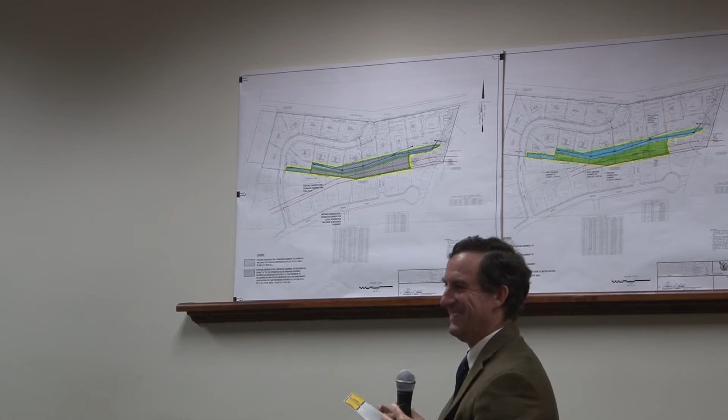RU 85. There you go. Football wasn't so good then either. Some things stay the same.

I'm going to mark A2 as plan sheet number 1 submitted as part of the application, which has been highlighted in color, and I'll describe those highlights in a minute. A3 is sheet 2 submitted as part of the application, again with highlights in color to mark some areas I'll describe in a minute. And A4 is a soil erosion and sediment control and landscape plan for Hillsborough Estates, which I received from the engineering department of Hillsborough Township, which I understand is part of the record for the approved plans for the project.

Let me walk through the highlights. First, the boundary we're talking about is being referred to as a conservation easement, a drainage easement. It's both. That's part of the issue, I think — it's not one area separately delineated as a drainage easement and one area separately delineated as a conservation easement. It's a conservation and drainage easement. So when we talk about changing the conservation easement to allow for some drainage, the conservation and drainage easement already exists.

I think part of the impractical aspects that has brought us here today is the enforcement part from the township's perspective — what staff members and homeowners are allowed to do and not do in those areas within the easement. And what makes it particularly impractical is not being able to mow the area — we've referred to it as a swale a number of times already, but the swale actually has drainage pipes in it.

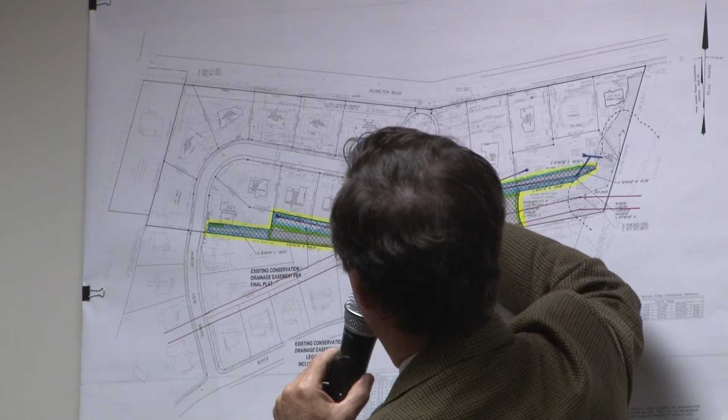There's catch basins behind these homes, there's pipes connecting the inlets. Going to Exhibit A2 now, directly behind all these homes, there's an inlet with a pipe going to another inlet, with a pipe going to another inlet, which collects runoff from the road through a drainage easement between two of the homes — lots 1911 and 1912 — and then continues on with a pipe to another inlet and down to the detention basin.

So the drainage features in that easement are not just swale areas that transmit overland flow — they're underground features, and obviously we can't allow trees to grow over top of pipes and inlets that are intended to provide for drainage. These are drainage features that are the responsibility of the homeowners association to own and maintain. That's really one of the fundamental engineering aspects of this application, which is intended to clean up what was intended.

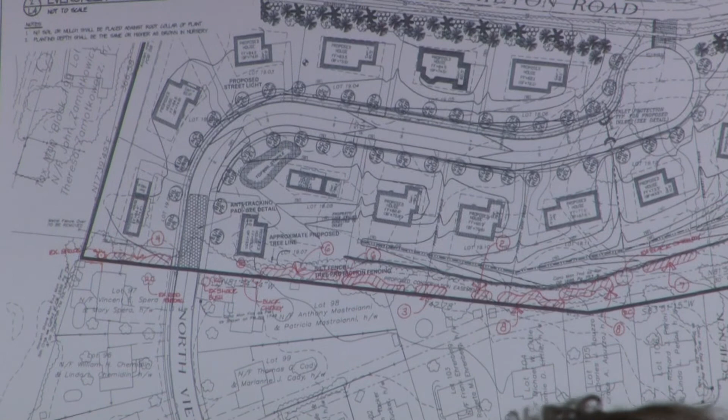Now I'll refer to A4, which is part of the original approved subdivision plans, and also has some handwritten red landscaping notes on it. I understand from Tom Bellinger, the assistant township engineer, that this exhibit was actually produced when the builder, as part of his construction, went into areas he wasn't supposed to, and because of bonding or other issues, Maser Consulting was consulted by the Township Engineering Department staff to come up with a landscape plan to put in some supplemental plantings to restore that area that was intended to be within woods.

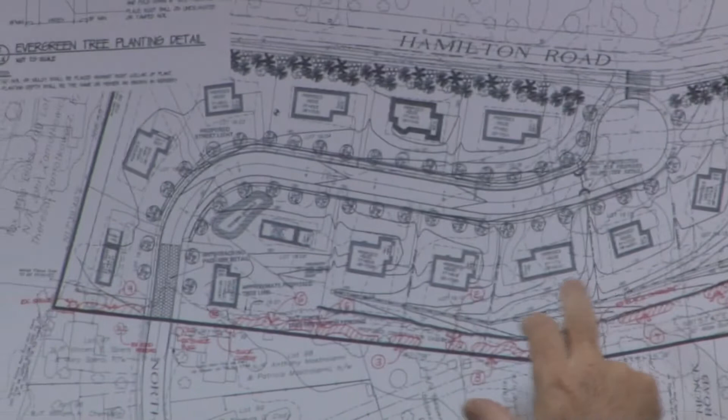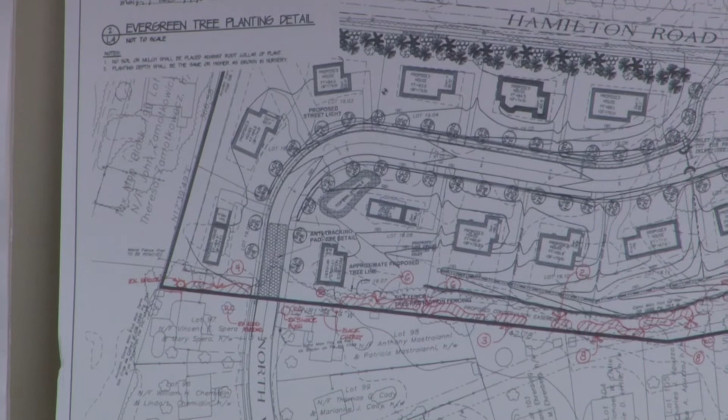This exhibit clearly shows not only the drainage features I just described — the underground pipes — but also shows the regrading area and identifies the limits of the wood line, what was intended to be the limits of the wood line. So there was never an intention on the approved subdivision plans to have a wood line 6 feet from the back of someone's house, which would be the result of putting up a sign 6 feet from someone's foundation saying it's a conservation easement that they can never touch, mow, or maintain. Eventually it would become woods.

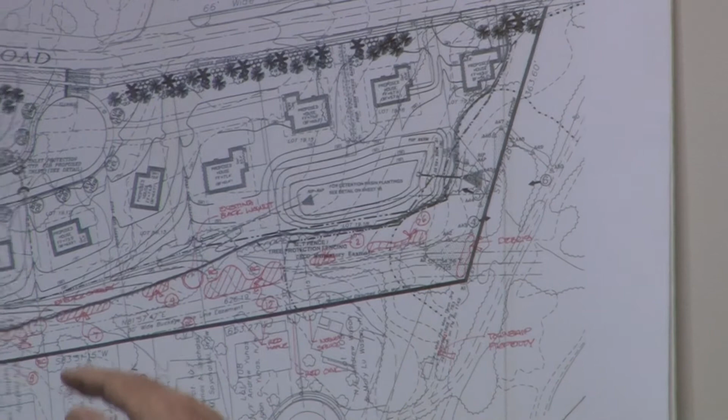So this is really what we're talking about is carrying out the intended aspects of the approved subdivision, maintaining a wooded area as a buffer between houses. The neighbors are a residential use, and this is a residential use. Usually when I talk to the board about buffers and supplemental plantings, I'm talking about buffering between two different uses, like a commercial use and a residential use. But these are two houses that we're talking about the buffer between.

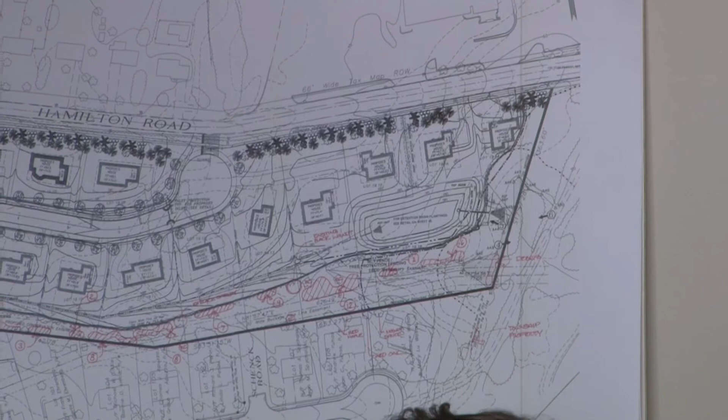But the plantings that were planted as part of this landscape plan are still there, and as a condition of any board approval this body may grant, these plantings, ensuring that they are there, can be inspected by the township staff. And these are all within that area delineating the aspect between what was intended to be conserved, that is the wood line, the landscaping, and then the drainage feature, which is the underground pipes and the swale. So now I'll go to Exhibit A3.

On both A2 and A3, I've outlined in yellow the entire area of this conservation and drainage area easement. We're not talking about changing the total area; the limits of that easement will be unchanged. What we're looking to do is really corrective action to delineate which portion is for drainage, that is, can have some things done to it, like mowing a lawn, keeping trees from going over top of storm drainage pipes, and what areas will be preserved where the trees won't be touched.

The trees that were there and the trees that were planted - that's where the conservation easement area signs would be moved to. So they would be moved from 6 feet off of someone's foundation to 10 feet on the other side of a pipe. When we talk about trying to delineate the limits of the drainage area easement, typically with drainage easements, they're 20 feet wide, 10 feet on either side of the pipeline. That's what we've endeavored to do here, and also follow what was intended to be the proposed wooded area limit.

So the blue area on Exhibit A3 would be the drainage area portion of the easement, and that would be a drainage easement that would be filed and recorded. It still has that same limit from the existing overall drainage and conservation easement, which includes that setback of 75 feet from the Buckeye Pipeline easement.

So the drainage easement, the blue easement, wouldn't allow someone to build something there. They would still be limited by the easement limitations, just like any other drainage easement, including the drainage easements that exist between two of the homes to carry drainage from the road down to this pipeline, the drainage pipe that leads to the detention basin.

The green area would be that remaining portion of the drainage and conservation easement that exists today that would be specifically intended for conservation. That would include that intended wood line, the existing woods, the planted woods, and as the Environmental Commission points out - and this is not something we're looking to change - it also includes that area which is the Buckeye Pipeline that's at the very rear of both properties, both the subject site and the neighbor's properties.

I feel like I'm putting everybody to sleep. I think it's really pretty straightforward. Your testimony is always riveting, Mr. Ford.

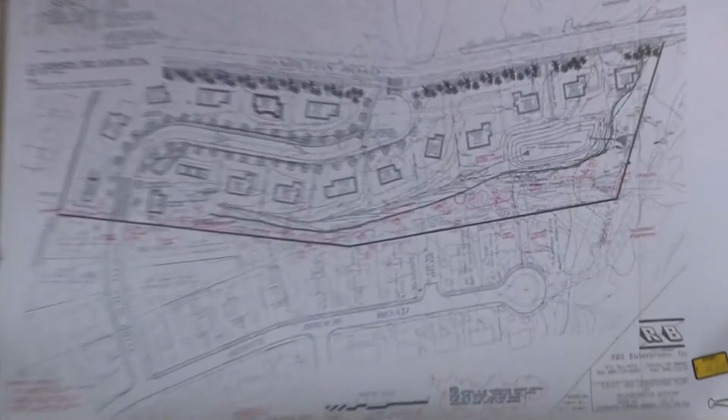He submitted to me an email, and I'll read it. It says, yes, the handwritten landscaping that was prepared by Mazur's landscape expert was made as part of the developer's approval because the developer cut down existing landscaping between the subdivision that they shouldn't have. The handwritten landscaping was added to fill in open areas. So the intention that Mr. Maskey points out is a valid concern, and actually has been addressed by another department within the township in implementing the landscape plan.

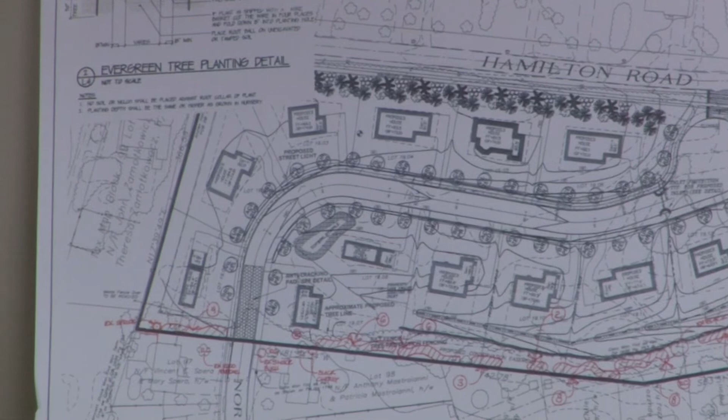And certainly we can have the township staff review the site conditions to confirm that that landscaping still exists. And that would also include that the conservation area signs be moved to their appropriate location. And I think the conservation easement signs included not only conservation area signs that were on the Hillsborough Estates side, but also on the other side in the area of the adjoining neighbors.

If I may, the reason for putting that comment in about a landscaping restoration/maintenance plan is to address the concerns I've heard today and in previous discussions with the homeowners, that the conservation area is somewhat degraded at this time—it's overgrown, there's mosquitoes, ticks, et cetera. There's been testimony tonight that the builder removed things he wasn't supposed to remove, and perhaps there's a hand-drawn landscape plan on the books now. Whether or not it's been implemented, I don't know myself.

My thought is that it would be appropriate at this time, under Mazur's supervision or at least review, to have a restoration and maintenance plan—first, for removing all dead, dying, diseased trees and all invasives, and coming up with a restoration plan for indigenous species that can be allowed to just grow on their own. Once that's done, I guess the homeowners association would be responsible for putting that into place.

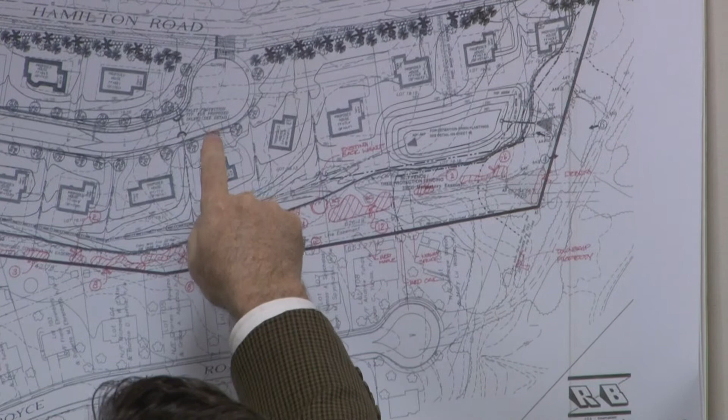You're talking about the area between the homes on Royce Brook Road, and the vegetation on the other side of the pipeline—is that what you're talking about there? Right, yeah. The pipeline easement—and I'm tracing it with my finger now—runs across Northview Drive, basically along the rear of the properties on Royce Brook Road, and then along the rear of the homes. It crosses the tract boundary and runs along the rear of the homes on the east side of the Hillsborough Estates project, and then between the Buckeye pipeline, which presumably would be maintained as Mr...

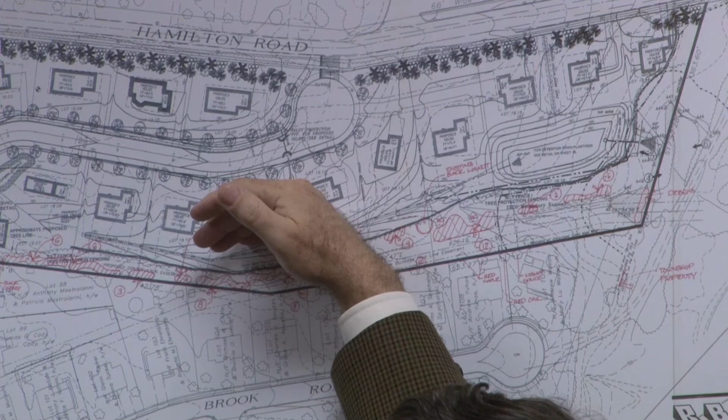Maskey's described per their requirements. There's an existing wooded area that was to be left undisturbed. And then beyond that, there was an area that was intended for drainage at the rear of the homes. We're not looking to change any of those physical features from the original approval.

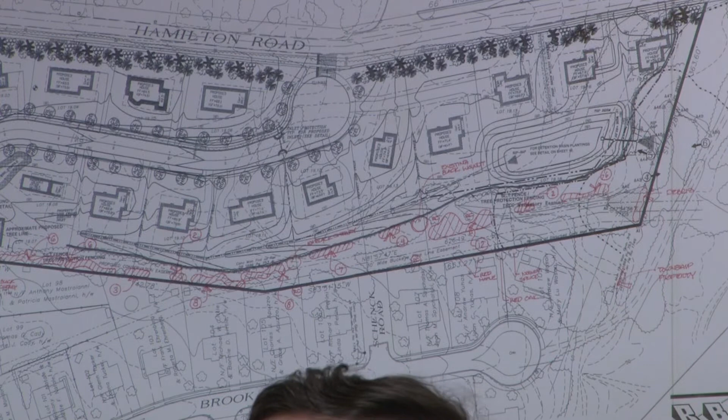It's really just to clean up the aspect of, unfortunately this is actually evident in the project itself, where there were areas on the east portion of the tract that had wetlands on them and were in the D&R Canal Commission buffer area that were placed in a conservation easement, just a conservation easement. And then there's a detention basin and some drainage pipes that collect water and go to the detention basin that are just in a drainage easement. There's no other title to the easement.

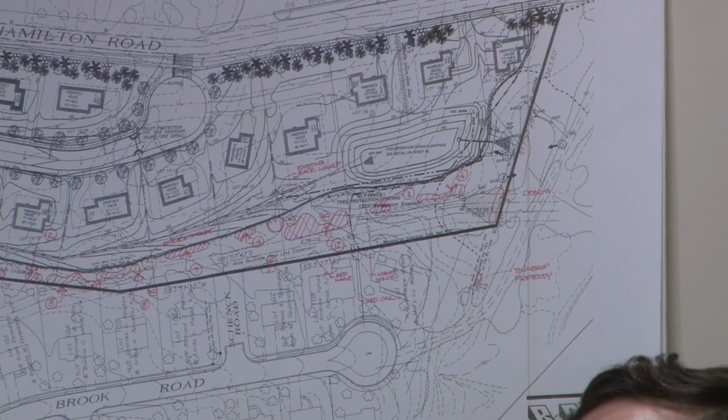So the description prepared between the applicant's attorney and the township attorney is pretty clear on what can happen in a drainage easement. I think the unintended consequences here were where the easement was created with a title of drainage and conservation easement, and there's conflicting requirements between those two issues. That's what we're really clearing up.

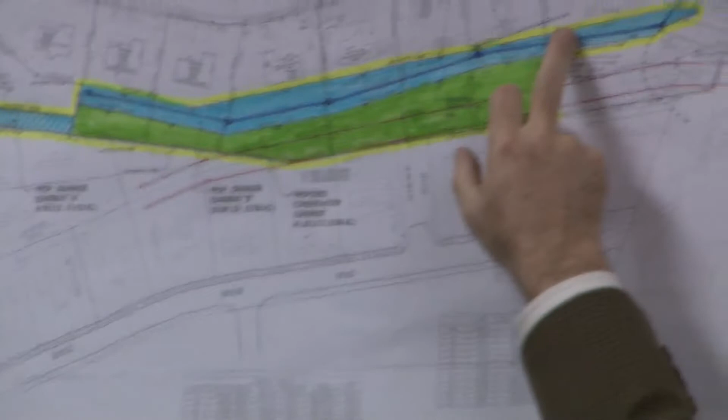So at the end of the day, the blue drainage easement here will immediately run into the existing drainage easements around the detention basin. And then the green conservation easement, that's the portion we're looking to delineate as part of that existing drainage and conservation easement, will run into the existing conservation easement around the wetlands.

This conservation drainage easement we're talking about this evening is not around any critical areas. There's no steep slopes or wetlands that we're looking to protect. It's really just that buffer between residents and the area along the pipeline. So, that'll be carried out.

In a nutshell, I'm going to try to put it in a nutshell. This is an easy one. I know it's not. No, it isn't. I've been thinking about this.

It's complicated. In reality, you're going to create this enhanced restoration area, okay? And however that's delineated between yourself and Mazer, then you would move the signs, and that would be, for all intents and purposes, your new conservation area, which would be that enhanced restoration area, and then you mow the rest of the area? Is that kind of it?

Correct. And that's the way it is today, actually. The area is mowed now. The exhibits that Mrs. Metters provided, except for the drone photos, show that area is mowed today.

Yeah, you would have to upgrade the landscape plan to whatever we agree upon in terms of enhancement of the restoration area itself.

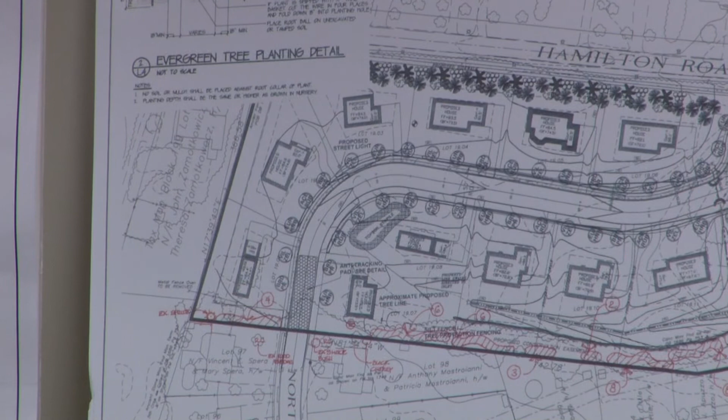It doesn't just say you can't do anything in there, you have to do something to continue its purpose. But that's a legal issue at that point. If you're asking the board, I would say it becomes a legal issue defined by whatever agreement you come up with at that point. That'll have to be worked out - what you can or cannot do.

In other words, the conservation easement that's eventually filed perhaps would include that you can do certain activities in there, like remove dead or diseased trees or invasive species, because if it's left to itself, it might actually degrade and not continue to provide that buffer between the residents.

All right. Right, yes. Mr. Chairman? Yes, sir. I've sat quietly for roughly an hour listening to this, for the record. And the reason I've sat quietly is I keep waiting to hear somebody say something I haven't heard yet, so I'm going to say it. What the applicant is looking for this board to do is memorialize actions that were taken by the homeowners - not so much the association, but the individual homeowners - regarding what happened in their backyards, whether they knew or didn't know, or liked or didn't like the fact that there were conservation easement signs and a conservation easement within a relatively close proximity to their homes.

The biggest issue that really occurred was that when this application was approved over a decade ago, there was no specific delineation as to exactly where the footprint of the homes were going to be. The builder placed the homes within the approved area, and some of them were exceedingly close

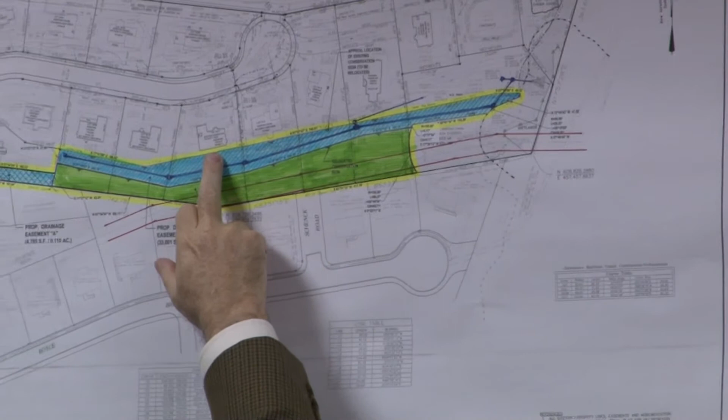Which house, just with the plans up there, is the house that has the sign 6 feet from the house, from there? Just to get an idea where the most egregious is. It's lot 19.12 and 19.11, both have the existing easement in close proximity to the foundation.

Mr. Chairman, I will admit that I don't recall every piece of this application, but I think to some extent what was envisioned was the houses to be placed closer to the street than further back from it, because the board spent, my recollection, a decent amount of time discussing the conservation easement. It was an issue that Mr. Ringelheim had. And I think, though the parties never discussed where the homes would be placed, I think to some extent it was envisioned that they would be closer to the street than they are now. So therefore these people would have backyards and then the conservation easement, rather than their backyards literally being in the conservation easement.

Can we just move the houses? Well, I'm looking at even where the houses are now. I mean, if they put the houses up almost to the road, it's still not much of a backyard the way they did that. Perhaps if I pass out a copy of A4, which is from the Township Engineering Department, shows the original plans.

It's already been marked. As I said, I'm not suggesting for a moment moving the houses or the like. I'm just saying that when this was all discussed, long before these homeowners got to live in the homes they're currently living in, or the homes who did and no longer are there, the builder was aware that there were going to be situations where the homes could be closer to the easement than others.

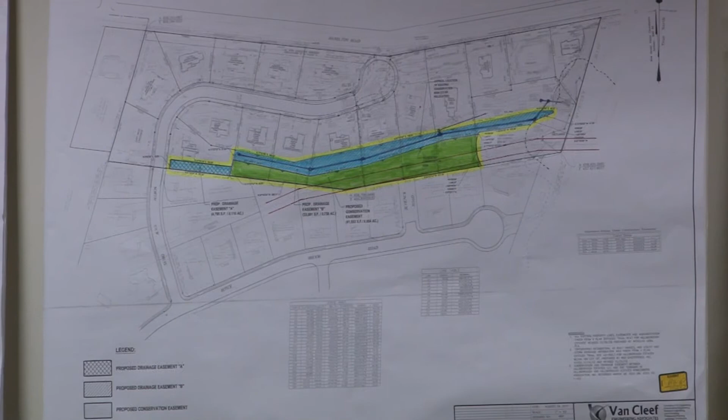In comparison to the exhibits A2 and A3, which are plan sheets 1 and 2, which show the existing homes, the way they were built, in comparison to A4, which was the subdivision plans and the plans for the intended locations of the homes.

In preparation for the application, our office didn't prepare the subdivision plans for this project, but what we did is secured plans of survey from all of the owners of the properties in question, as well as the as-built plans from the engineering department that were part of the certificate of occupancy for those homes. So the existing homes are shown accurately on the existing conditions plan and the proposed condition plan, sheets 1 and 2, that were submitted as part of the application.

What we discovered in contacting your engineering department is A4, which is the soil erosion and landscape plan that has handwritten red line landscaping that was implemented during the construction, at the direction of Mr. White's office, to accomplish that buffer that everybody is talking about. We're not looking to disturb that or change that, and any maintenance or ongoing restoration and continued review of that can be part of the easement language for that conservation easement.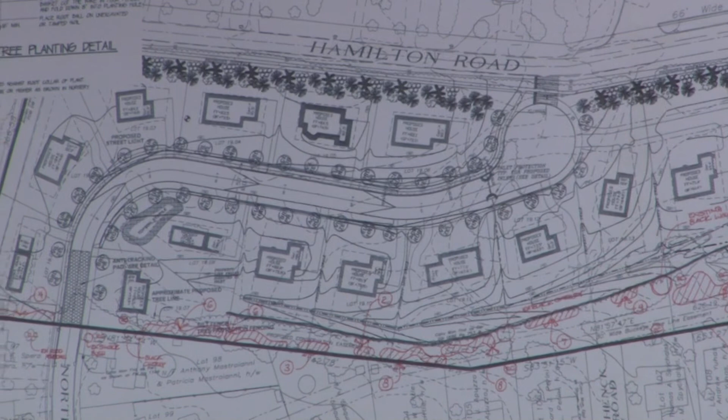I don't recall a condition where we had a conservation and drainage easement written in one document. They're opposing, and in this case, we're not talking about even an overland swale that could potentially be construed to allow some vegetation over it. We're talking about a drainage area that has underground features in it, pipes, catch basins, that obviously cannot have vegetation growing over it.

If I could just offer to the board, the association will agree to satisfying the condition of basically what Mr. Maskey suggested about having a restoration and maintenance plan for landscaping in the conservation areas that are delineated there. But we want to make sure that it doesn't get into the areas that we have delineated for drainage, for the reasons that Mr. Ford has mentioned.

So at the end of the day, we need to put a line on the map, okay? So, Mr. Ford, sheet 2, which is the amended easement, which exhibit is that up there? That's A3, the middle one. My understanding, correct me if I'm wrong, is that what the applicant is proposing is that the line be redrawn as shown on sheet 2, A3, correct.

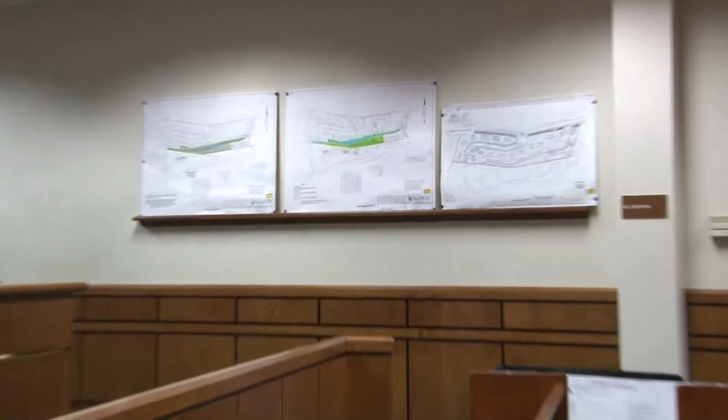Which shows a varied width easement covering the drainage facility and a varying width on the portion of the conservation easement that's for the landscape buffer. I think that's what they would be asking. If the board were to make a decision or to vote on something concrete, it would be to delineate these two lines on the map as shown on sheet 2.

So you see the exact, and the question was asked before, can we move the signs? Certainly, but we got to know where to move them to. Yeah, we need a line to move it. So we need a line on the map. It's as simple as that, really. For all this discussion, it's really about a line on the map.

But that goes back to my earlier question, though. If you move the line, does that then create other waiver requirements? Not to my knowledge, shouldn't have. The board already approved them to do the grading, put that drainage system within that 75-foot buffer.

Okay, so that was pretty much way back then. I think drawing a line on the map would differentiate the rules applying to the drainage portion of the easement from the rules applying to the conservation/buffer portion of the easement.

Those rules are fairly direct, I think, over whatever the appropriate width of the drainage easement, and I'd defer to Bill on this. Yes, you can mow it, it needs to be kept clear, the catch basins have to be left unencumbered, and there has to be an appropriate ability to maintain the pipe.

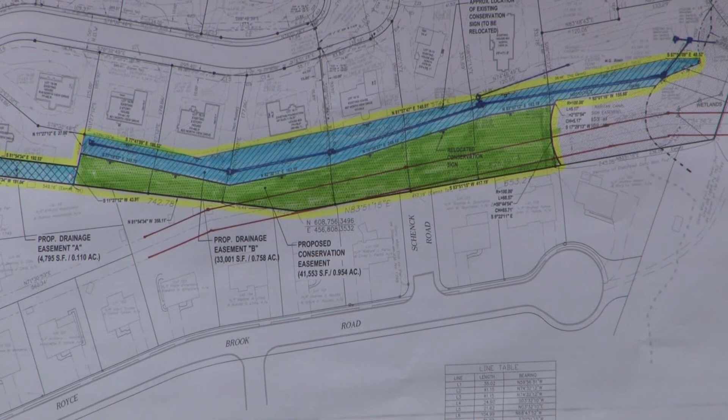I remind you, Mr. Little, you're still under oath, so just use that as... Thank you for the reminder. Well, for the record, where it's the reminder, but also just in terms of your own comments. Mike Little, 87 Roycebrook Road.

If I recall, the filed Amendment 1 in the folder available for public review does delineate the difference between conservation and drainage easements in the discussed area. It indicates the 75-foot buffer is to be conservation, and by implication, the 25 feet that are left would be drainage. Now, I understand the concerns for maintaining the underground structures - I'll stop calling it a swale - and I think that's certainly a concern that needs to be addressed by the board in this particular situation.

One thing I am concerned about, in terms of drawing a line on the map taken from the map provided by the applicant, is that the applicant is actually requesting some of the conservation easement area that is not adjacent to the drainage area to become a drainage area. That specifically would be the small section that abuts North View Drive.

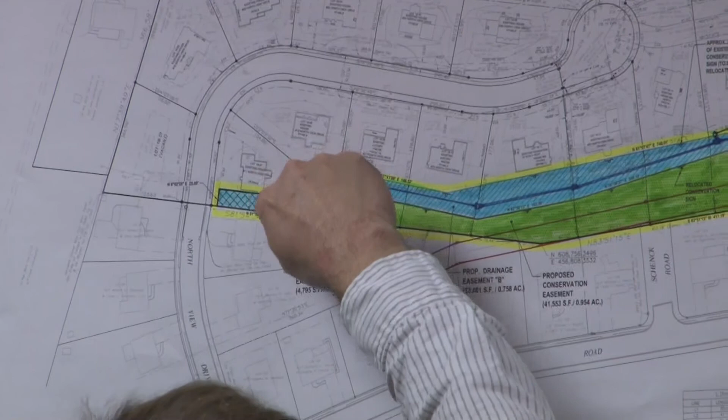Can you point to that on the map, please? Mr. Little, Mr. Ford can give you - no, he can't. This area, the block. Mr. Ford could clarify whether there are any underground structures there or not.

The highlighted area is adjacent to, what, 1907? Am I right, Bill? I think it's 07, yeah. Yes, this space. Yeah, there's no structures there. You're correct. It looks like a swale between that property and the adjoining property.

And on A4, which is the landscape plan approved as part of the project - the remediated landscape plan, correct - those plantings would be preserved by virtue of creating it that way.

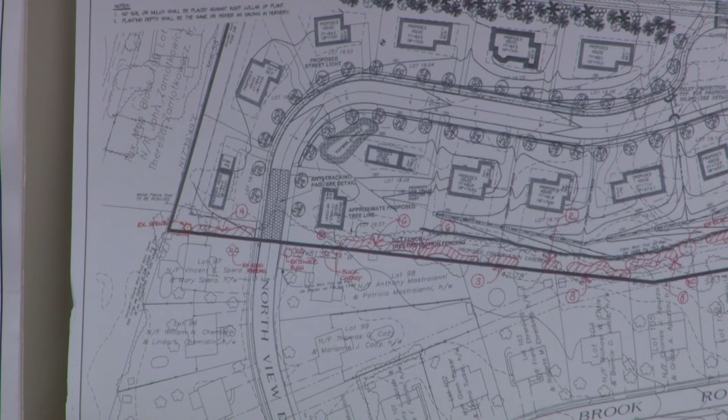That's an area too where, if you look at A4, this is the first house on the right-hand side as you come into the project. And I'm looking at the subdivision plans now - it looks like a 20-foot setback from the side property line, and the house shown on that lot, per the subdivision plans, is about 20 feet off the property line.

So if you were to create a conservation easement within that 20-foot area between the house and the tract boundary that couldn't be mowed or maintained, allowing trees and woods to recover, that would be a situation where you'd have trees growing too close to a house, which isn't safe. But we would continue to preserve the easement for drainage. So yes, we're suggesting that's more appropriate to identify as a drainage easement - no structures, all the limitations of a drainage easement, continuing the overland swale, but not allowing trees to grow there. Not making it woods - it wasn't woods before.

It certainly was, I mean, it was a buffer for the brick factory. Woods had grown there. Obviously, there was not woods there at some point in the past because all of New Jersey has been clear-cut at some point.

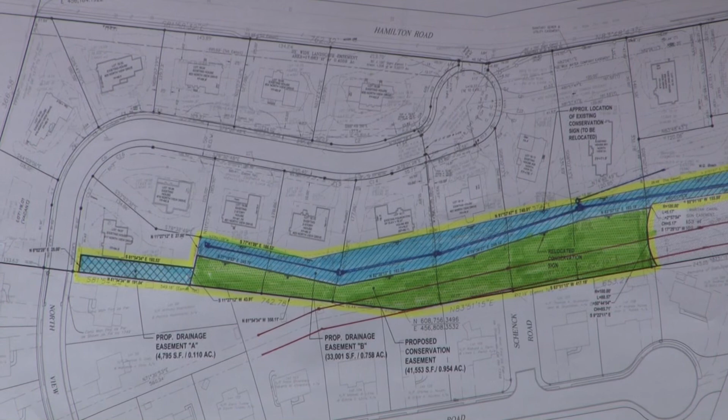I'm not quite sure what the wood line actually is, except relative to where they might have put those trees. I'm just referring to the subdivision plans that were on record in the engineering department that identify the proposed wood line. And then they also have some supplemental plantings within the wooded area to address gaps in that wood area. That makes sense. Yeah, okay.

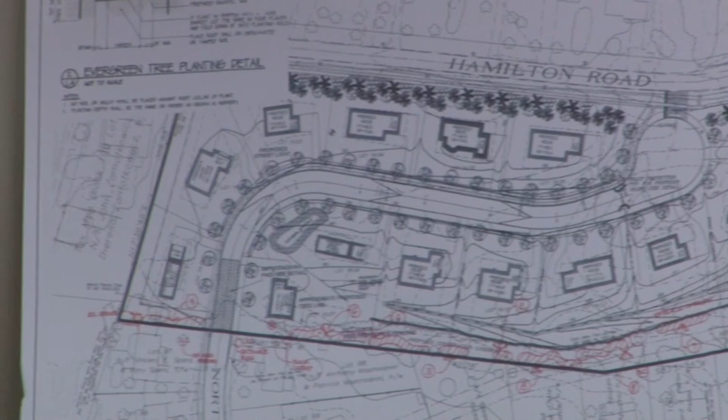The line that seems to be currently established is how close the homeowners felt comfortable mowing to the fir trees that were planted on the remediation. That seems to be the current line. And the distance that I had looked at on the filed exhibit, I only looked at from the center line towards my property, and that appeared to be 20 feet.

I do understand that on the other side, actually, if there was any conservation area left over, because as was mentioned, if you just took a 20-foot wide swath and followed the drainage area, some conservation area remains between the house and the drains. But the applicant is requesting that to be treated the same as a drainage area, which in some sense makes sense, because whether 20 feet is big enough for the conservation easement purpose of a buffer, I can't comment on that because I don't know what the minimum size might be.

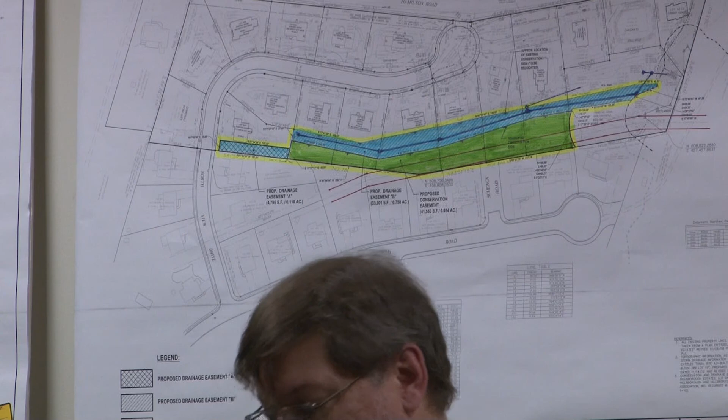Call to order, we're now back in session. It's 9:28, it appears. Mr. Chairman? Yes, sir. If I may, I'm sorry, are you done, or are you going to continue? You asked me a question and then— Go ahead, right, go ahead. I didn't know if there's a follow-up to that. So, I don't remember what the question was. Where I live. Oh yes, that was all, just from a matter of standpoint for your reference to the application, that's all. 27 years. Okay.

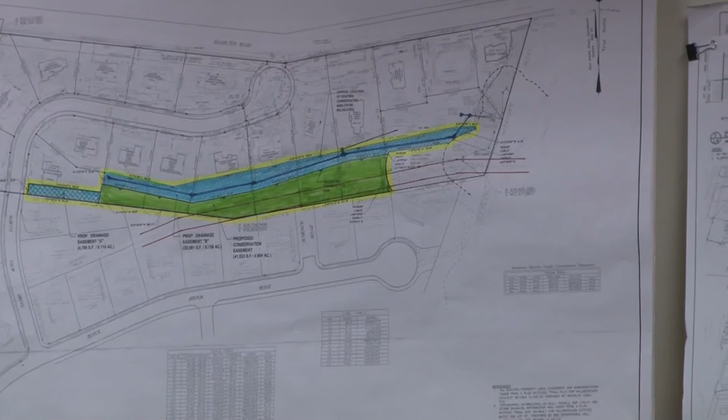It comes down to, again, drawing a line, and in conversations with Mr. White, we suggest as a solution that the drainage boundary, the less restrictive of the areas, be drawn 10 feet to the south of the storm drain pipe. And everything south of that towards Royce Brook Road would be in the conservation easement. The one exception would be the tail piece that was spoken of before that actually doesn't have the pipe under it—that would also be considered drainage. So it would be 10 feet to the south of the pipe that would be the limit of the drainage easement.

Okay, throughout the length of the pipe, yes, the length of the pipe. And then anything south of that would be considered conservation. Correct.

Yes, Mr. Chairman, we're fine with all the conditions that Mr. Maskey has proposed thus far. Okay, I just want to make sure we're clear that the 10-foot across the length of the drain, that's correct. And we're going to have metes and bounds descriptions accompanying the easement.

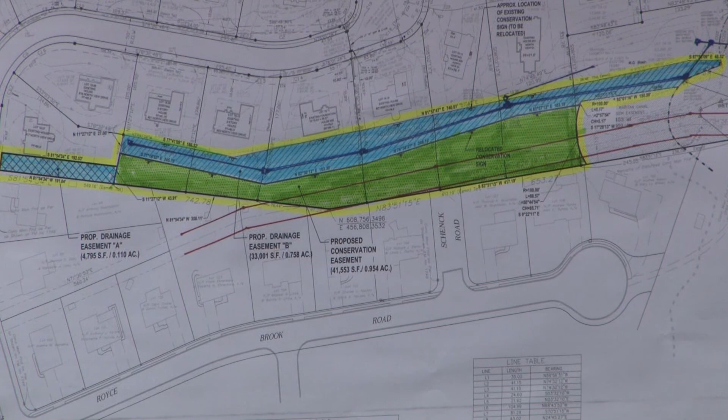Okay, so then we have a motion. Oh wait, are there any other members of the public? I'm sorry, oh we got one more. Just have some questions, come up to the mic first, okay.

My name is Gary Bowmans, 83 Royce Brook Road.

So this discussion's about moving the line. How will the line be delineated so that everybody knows where it is? The discussion about remediation of adding vegetation or trees, that has to be resolved. That has to be part of this condition.

What was the other one? Those were the two that really stuck in my head. How would it be delineated? Yeah, once the line is surveyed, the signs will be placed as surveyed at the boundary, okay.

On both sides of the easement, so make sure they're on Northview and Royce Brook. For the future, I mean, this is a debacle that you're all suffering through, and the homeowners are too.

I don't understand why when a developer wants to develop property, he has to mark the property, he hires a surveyor, marks the property, has corner markers, then removes them so he could sell the property, so the homeowner has to then pay a surveyor to remark the property. If this was all marked out right from day one, we wouldn't be here. The homeowners making the purchase would know here's where everything is, and this wouldn't happen. I needed to make that comment, because it's just making me not understand how this happens.